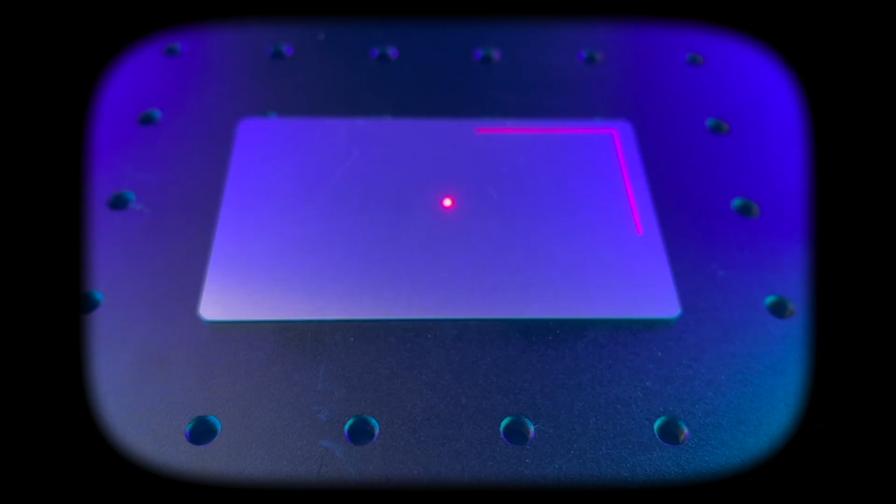Longer reached out to us to send their 12-watt Nano Pro Galvo diode laser. What's really cool about this particular laser is its portability. This is really the laser, so obviously very portable. They also sent us, as part of the package, a rotary extension and a slide extension for bigger projects. So let's get this unboxed.

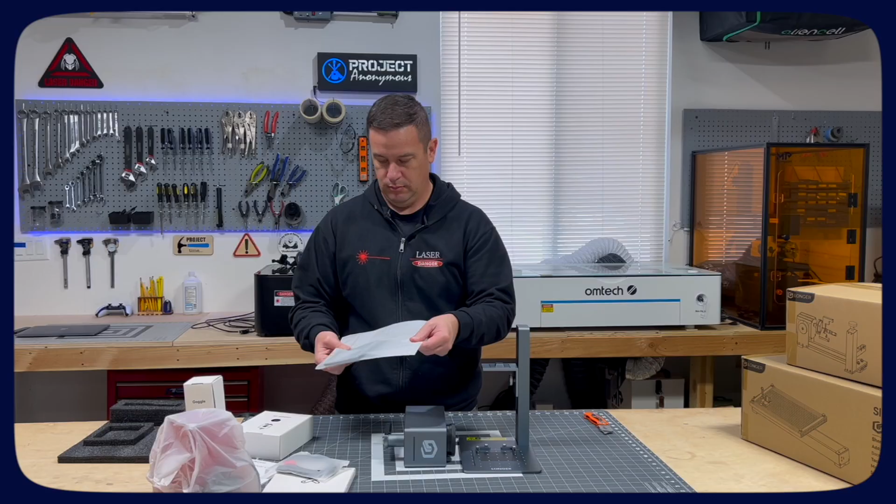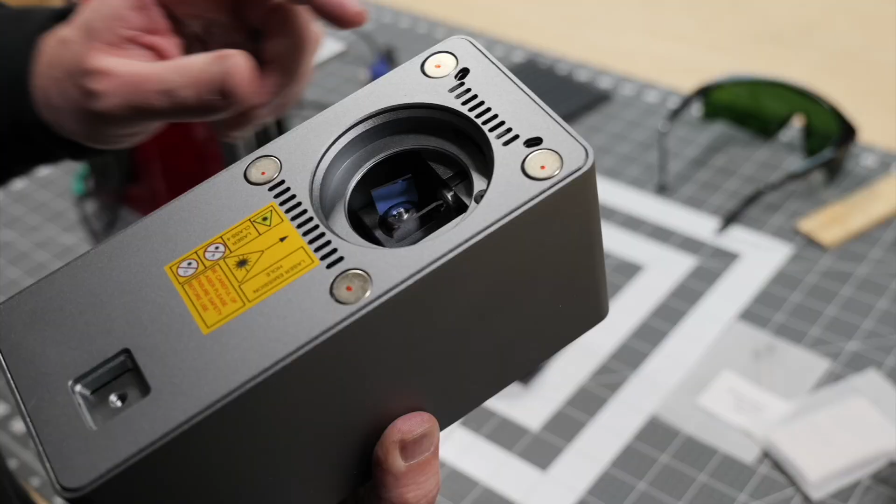Okay, this is it, everything that comes in the box, and we have it laid out. This is our laser head, obviously very compact, and what makes this kind of unique and different from other diode style lasers that we have is this is Galvo controlled for our axis control. Rather than using servos to move a laser head back and forth, it uses tiny little mirrors, which you can see here, and these mirrors move, which adjust where the laser is firing and going through our lens, which makes it so that we can run this much faster than we can a standard gantry style diode laser.

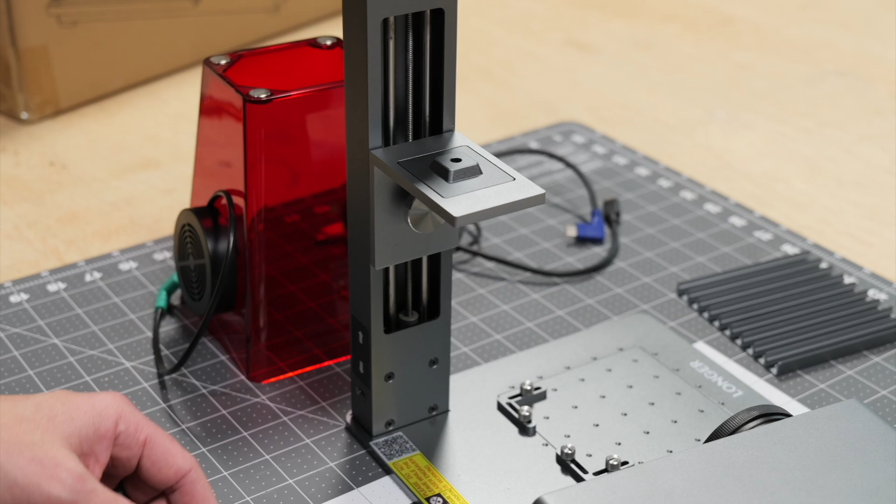Also in the box is our little stand here. It does have electronic up and down motion. It's not autofocus, but you can just push a button to get the laser head to move up and down. And then it comes pre-installed with a flat base plate with standoffs here to get repeatability, like if you had a bunch of projects to do.

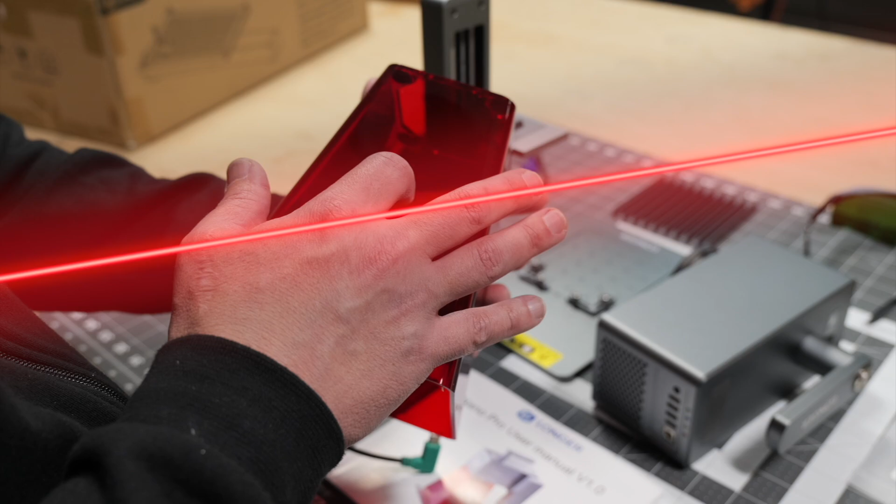It also comes with a cutting bed, which is three-dimensional here. It gets it off the table so it can cut through whatever material you're going through. Comes with a protective shield to make sure no stray laser beams are flying around our area. And comes with an integrated fan to suck out the smoke if you're engraving and cutting.

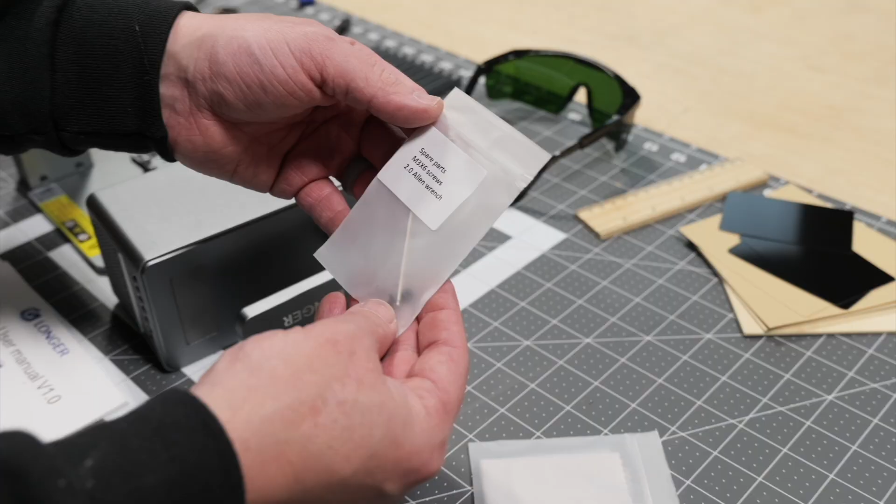Comes with some cables. We have a data cable here to connect to our computer and a cable to connect the laser head to the base plate. We have our power brick, a 12 volt 5 amp brick, a little thumb screw to connect our laser head to our base plate, and a software USB stick. This comes with LaserGRBL, comes with some goggles and a nice cleaning cloth, some spare parts and a tool, a focusing ruler, and then some test material. What we have here is painted aluminum cards, some paper, and a couple 2mm birch plywood pieces. And of course our instruction manual.

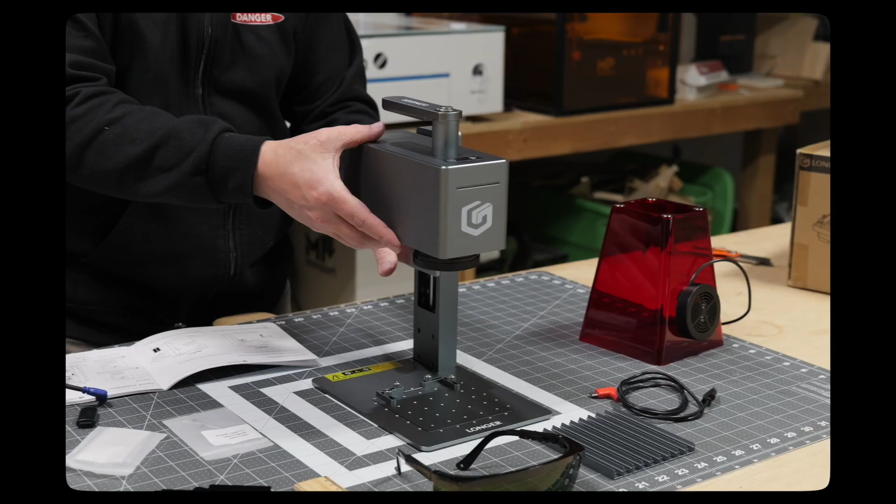It has some strong magnets on here as well as on the underside of the machine.

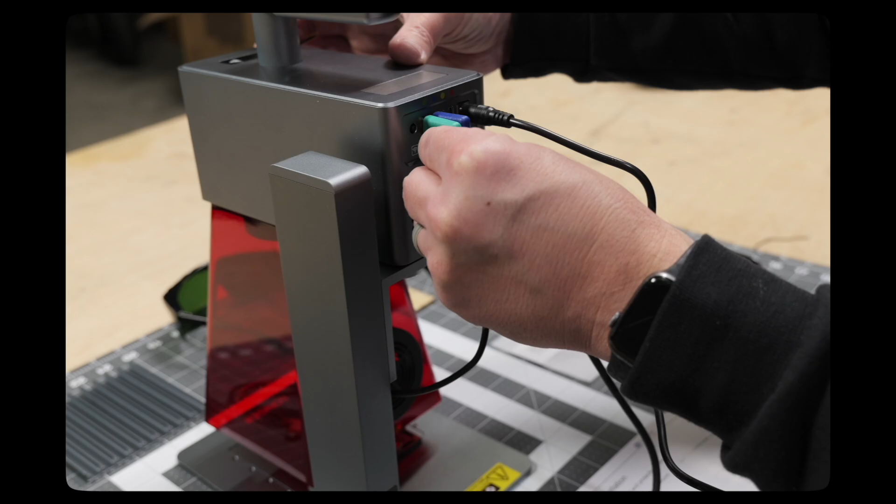We're on our computer now and we've plugged in the drive that came with the laser. It's very important that we install everything in the correct order or the machine won't connect to LightBurn properly. So the first thing we need to do is open the drive, and it comes with different files including instructional videos. It also has detailed manuals. Right now though, we're going to open up the software folder, and we want to copy over this driver zip file and open it.

In this file, there's an option for Windows and Mac. We'll be utilizing the Mac one because we're using a MacBook, and it comes with even more instructions that are very detailed and beneficial for this process.

What we need to do now is open the package file and continue through the pages and install the driver. Now we're going to click the install button again, but it's blocked, so we had to change some of our security preferences.

It's now installed, so we can close all of these windows. We also need to restart our computer.

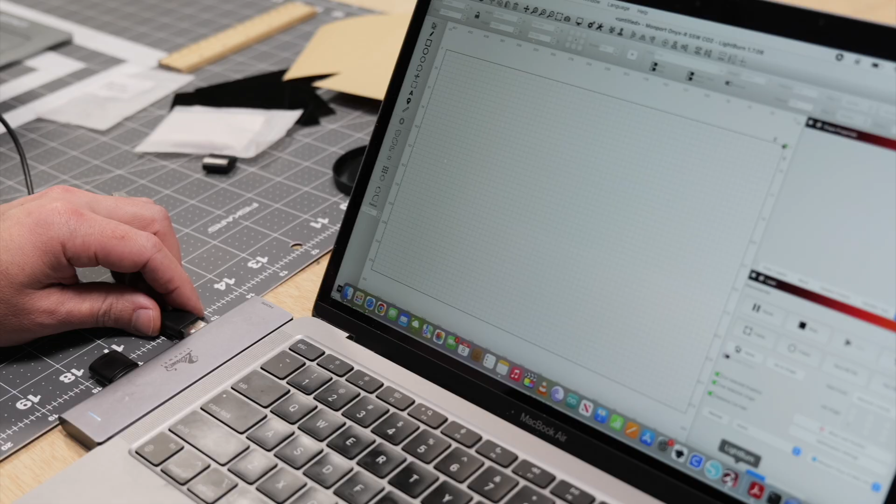Next, we want to plug in our laser and turn it on. Then we'll be able to connect to LightBurn by switching over to our Nano Pro. We need to use this specific USB serial or else our console won't show up properly. And now we're connected properly.

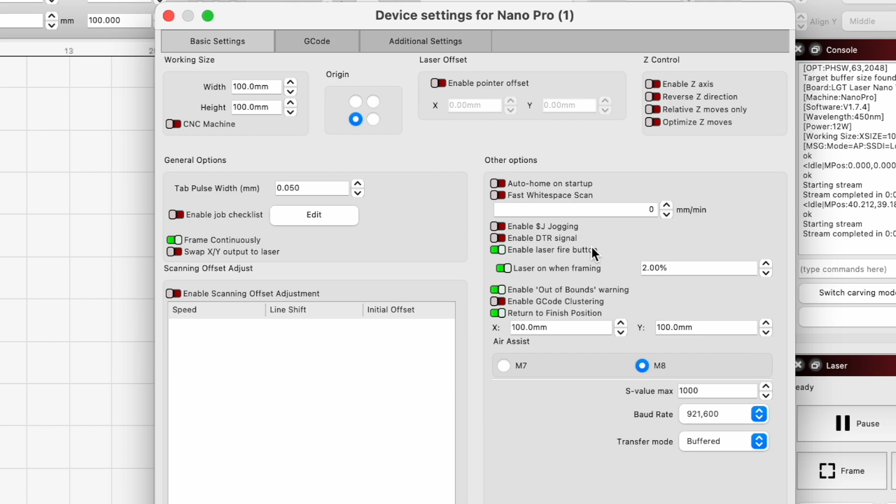We'll also do a test by framing out a square. But first we'll go to our device settings and we want to make sure we have our laser on when framing. We also like to have our laser frame continuously. Now we'll adjust some settings in the Move tab, which we like to have our speed as fast as possible, or 10,000 millimeters per minute. Finally, in the Console tab, we need to select the Switch Carving Mode setting, and we can now frame out the square.

And you can see we're framing. So now we're going to do a materials test on this aluminum card to see what settings we need.

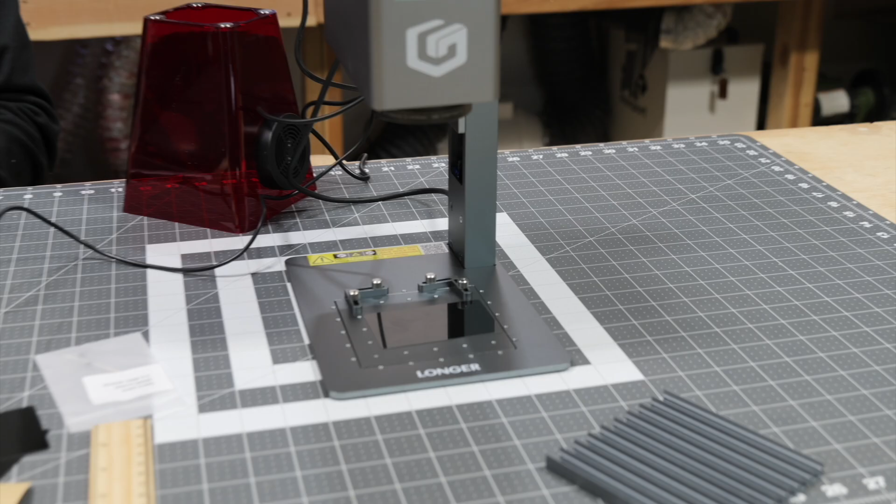To create our material test, we'll go to Laser Tools and Material Test. Then we're going to adjust our settings for the aluminum card. We'll do a 2x2 grid, a power param that goes from 20 to 100%, and a speed param that goes from 100 to 10,000 millimeters per minute. And finally, we'll adjust the settings of our text and material.

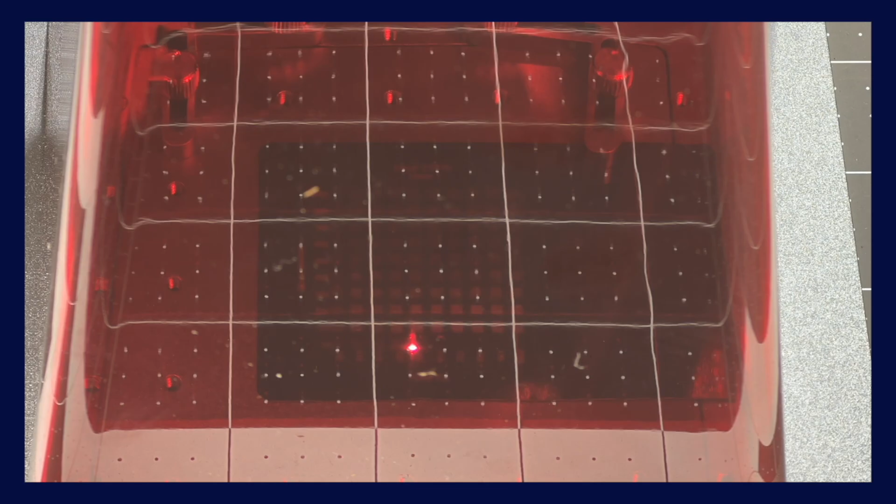We got some good results in here. We have a nice little gradient. We have a clear image. Yeah, even at the 10,000 millimeters per minute speed, which is really fast for a diode laser.

Again, comparing this against a gantry laser, there's no doubt this is way, way faster. This is almost like our fiber laser speeds here. Well, it's really like our fiber laser speeds, because the Galvos being the mechanism to move the laser along rather than an entire laser head across back and forth. So really neat here. You got some good, nice engravings. Well, let's do the other side with the Longer logo.

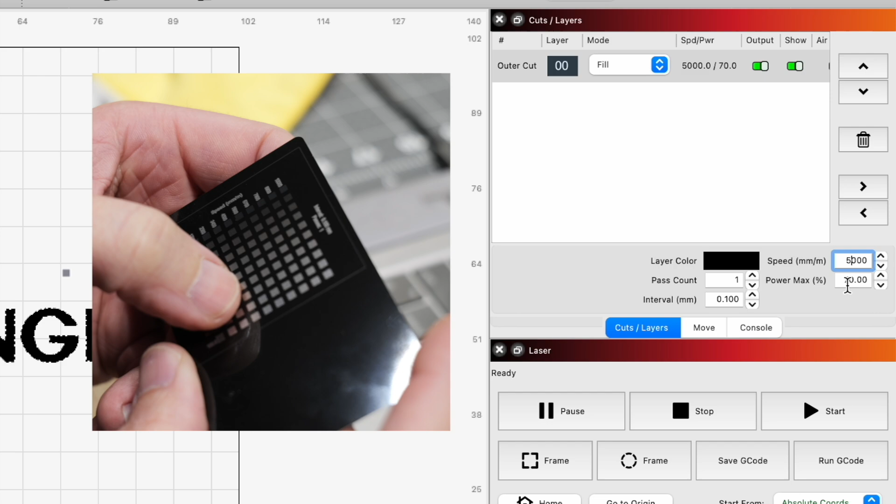What power are we going to use? Let's see. Let's do 5,000 and 80% power. So we can use this as well to get our height adjustment, or we can use the 2 laser dots. I go ahead and frame it and lock it down.

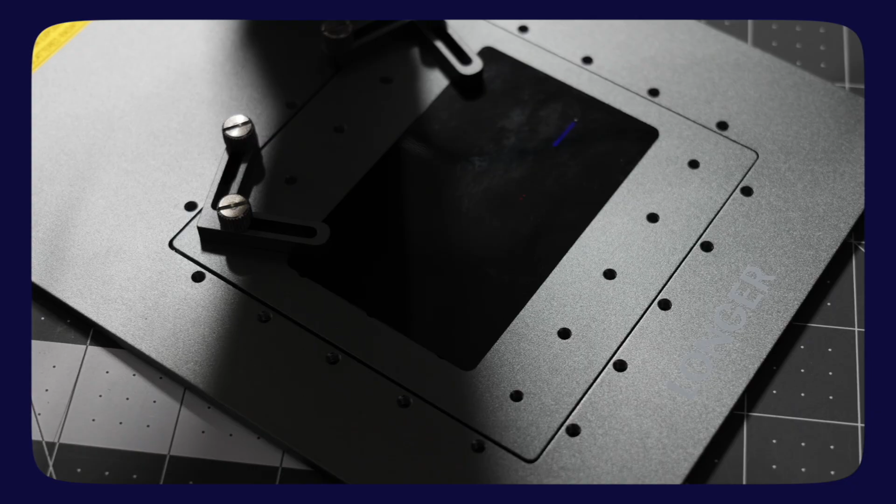I think the coolest thing about this right now is, I mean, listen, it's so quiet. It is really, really quiet. You can hear the sound of the little fan on the back of the shield and the fan that's inside the laser head module. But like, we don't have to listen to the gantry move back and forth. That's really neat. Obviously, the other really cool thing about this is, look how portable this is. It's so small. We could take this anywhere.

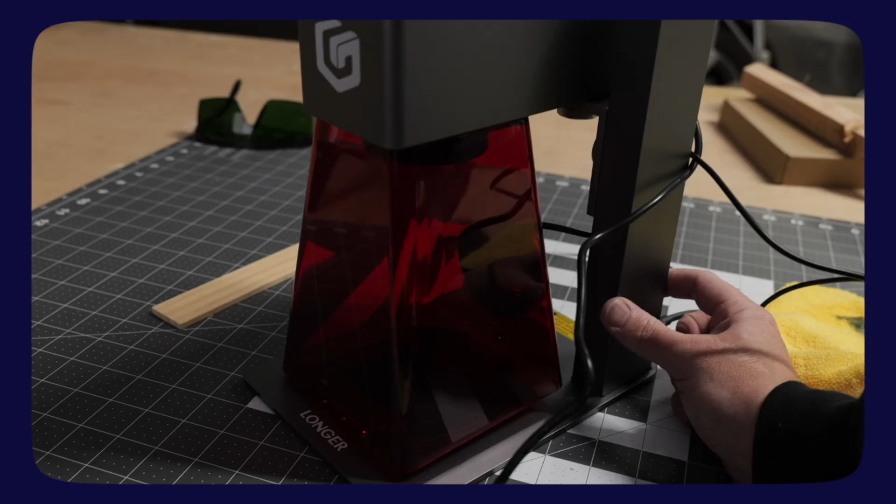It's really clean. I like it. Took all that coating off of this little aluminum card. Really happy with that.

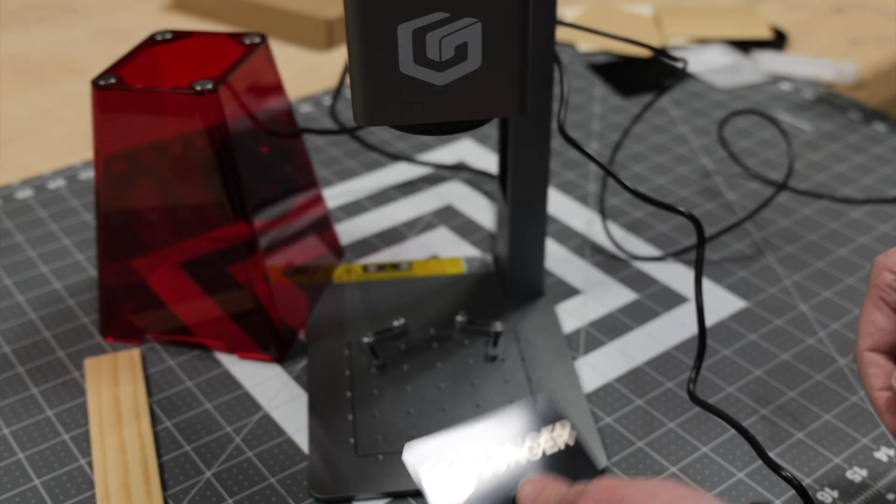Okay, so we've completed tuning up our laser using the offset adjustment. If you're interested in details on how we did that, check out our video on offset adjustments.

We're again in LightBurn to do an engraving material test on wood. We'll do a 10x10 grid with a speed param of 500 to 15,000 millimeters per minute and a power param of 10 to 100%. We're also going to adjust settings in the Cut Settings editor.

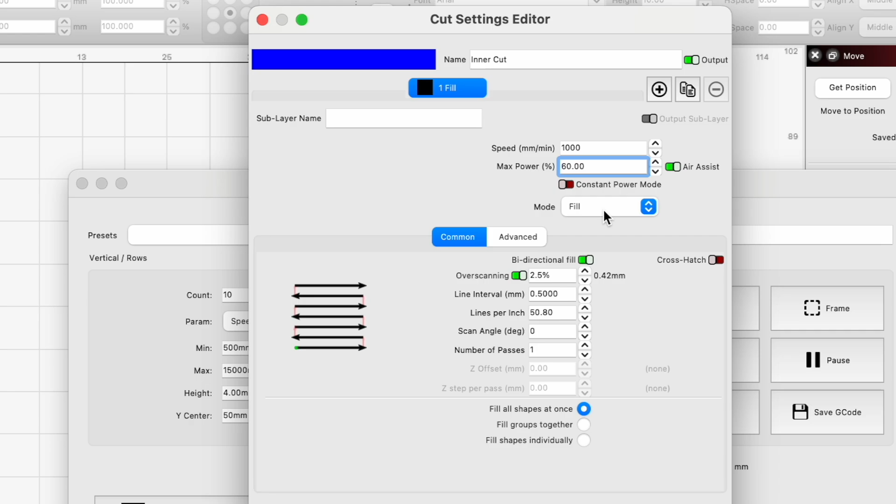So unfortunately, I'm using the brackets to hold this wood straight because it's sort of bowed, but in its outermost hole here for the brackets, it conflicts with the guard here before the laser comes in focus. So I can either engrave it without the guard, which is not something I want to do, or I can figure out another way to hold this flat. And I think I'm going to try that.

So I went ahead and stopped the engraving because clearly we are just burning. So we got some really good engraving marking here. And then we saw we went way too slow with 500 millimeters per minute. Overall good results, and we got some good settings that we can save for future use.

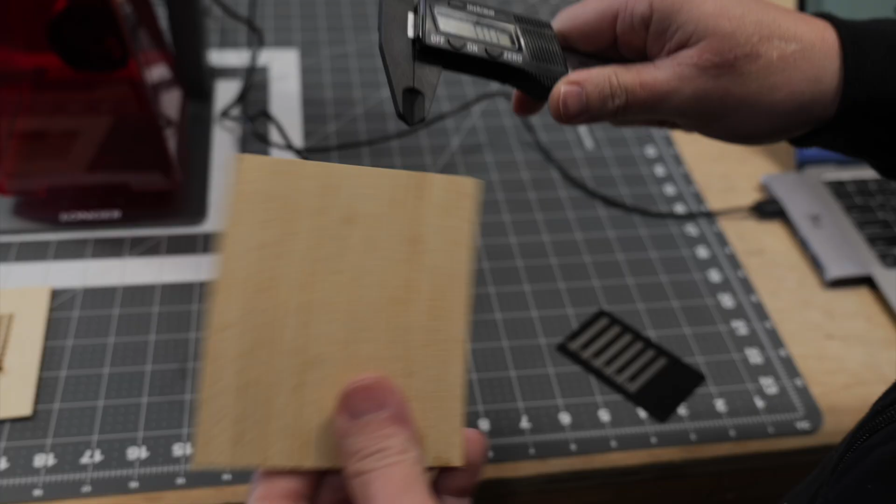So now we're going to do a cut test with 4.5 millimeter or 0.18 inch thick plywood. For this cut material test, we'll do a speed param of 500 to 1,000 millimeters per minute and a passes param of 1 to 6. And we need to make sure we are using the line mode in the material setting because we're doing a cut test.

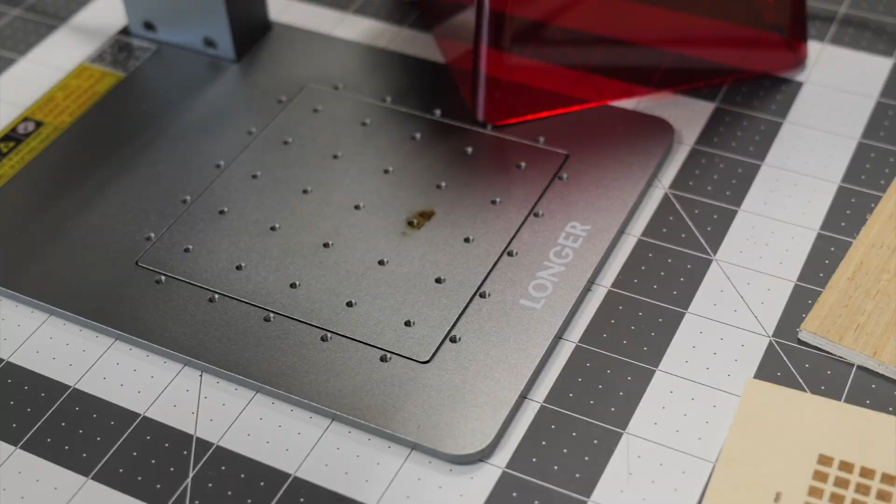See, our engraving went a little too deep, but that cleans off pretty well. Use our cutting table.

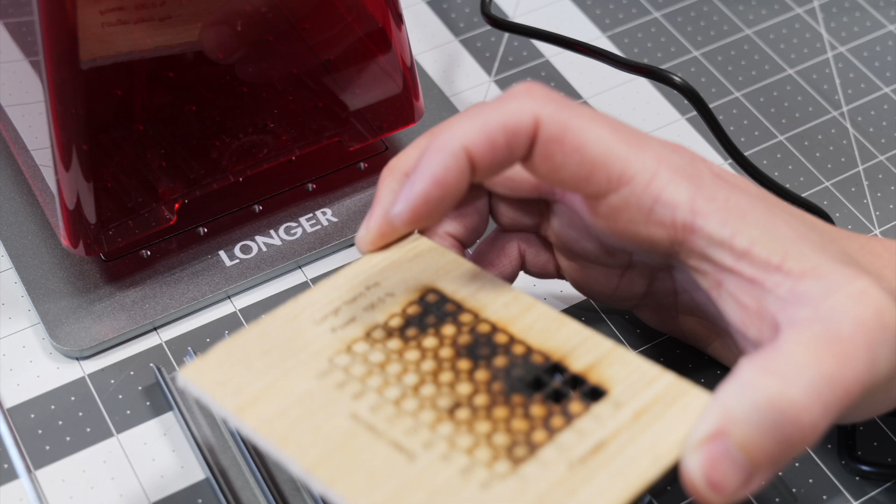Well, it looks kind of charred, but it did cut through some of these. I think the key is lower power, faster speed, and more passes to get a cleaner cut. But I think obviously the true value of this is engraving anyway, but it is capable to cut.

Now that we've completed some of the testing with our laser, we're going to go ahead and dig into some of the accessories that Longer sent us. The first is this slide extension, which takes the active work area from 100 by 100 millimeters to 100 by 300 millimeters in the Y direction.

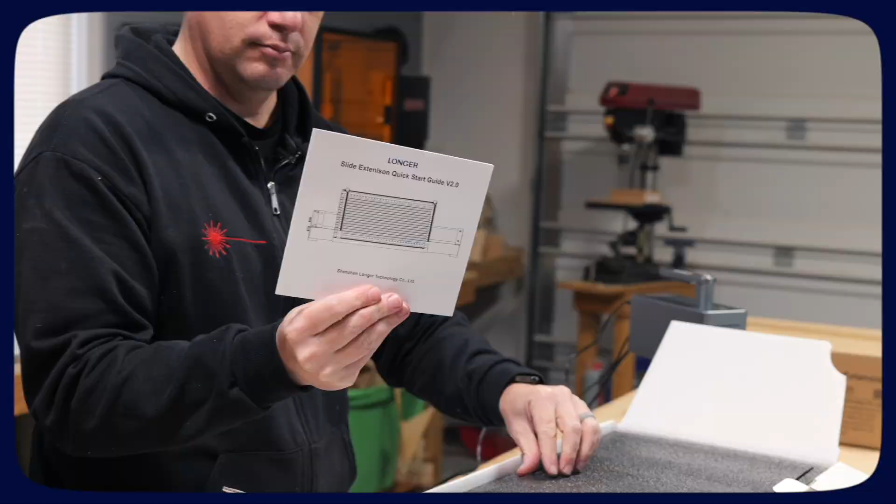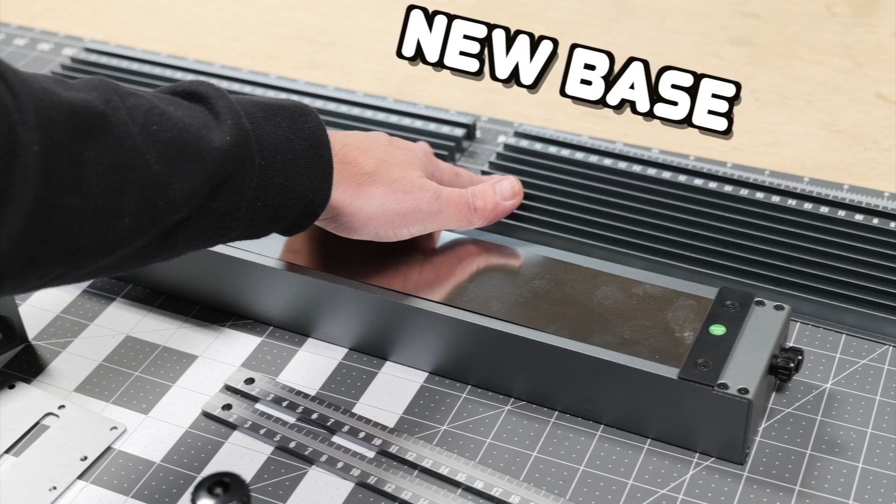Okay, so here's it all laid out and everything that it came with. Here's our new, basically our Y gantry now, or slide, so it will actually move in this direction. And then the new base came in 2 pieces with a little base plate here. Comes with a riser for our laser head to move it up, along with a thumb screw. It looks like some workpiece attachments to secure your stuff, some scales to help connect the 2 halves there, some feet, the cord that will end up connecting this motor to the head of our laser, and then some hardware.

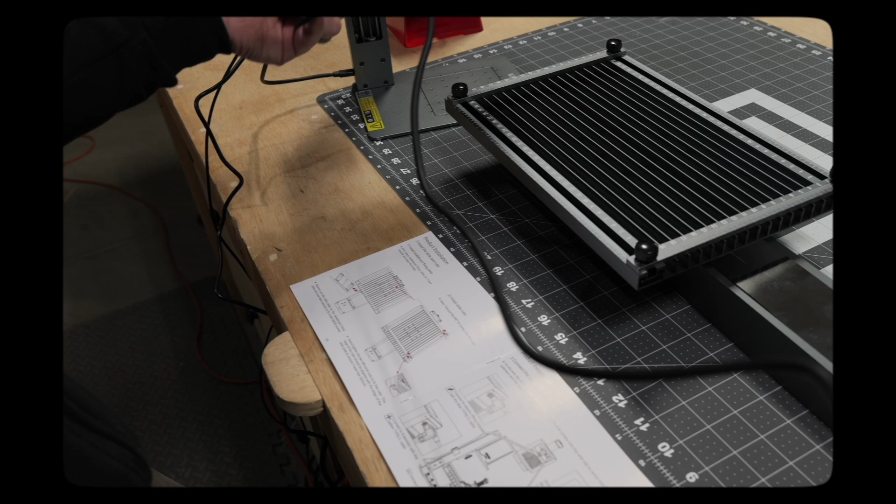This is to make sure that none of these cables get stuck in here as it's traveling.

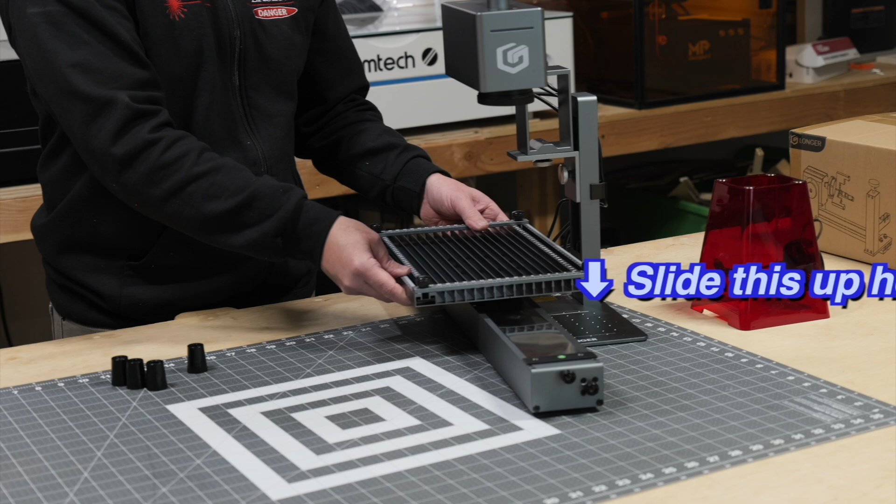There must be some kind of redesign here with the slide, because you're supposed to just slide this up here and that would be kind of where it's set, but the feet are different. Nowhere in the instructions does it tell you to put the feet that come with it on, but this does significantly raise it to where it'll be a lot higher, and we wouldn't have anything to rest this on. So I'm going to go ahead and put the feet on because I really have to, otherwise our piece will just fall over like that.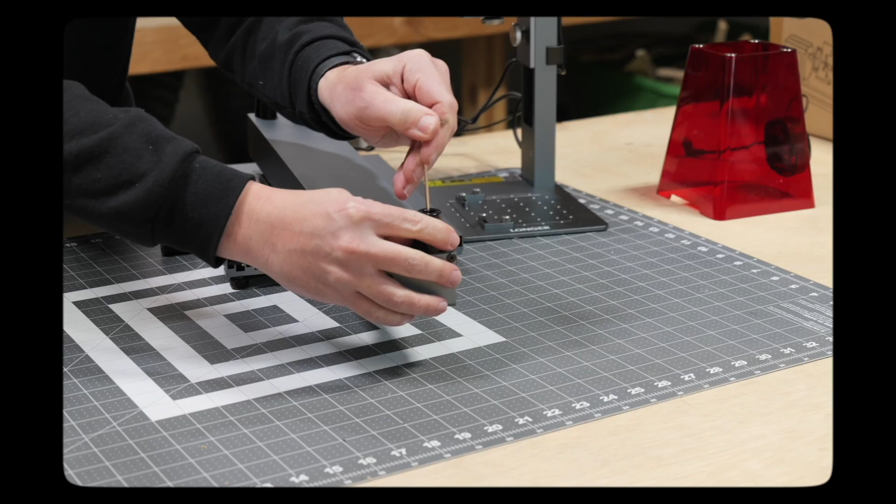So you can see here now with our feet on, we don't have to worry so much about it tipping over. There's nothing to rest this on to ensure that we are completely straight in the Y direction, so we're going to have to come up with a solution to make sure that we're always set where we need to be. But anyway, that looks like everything we need to do here.

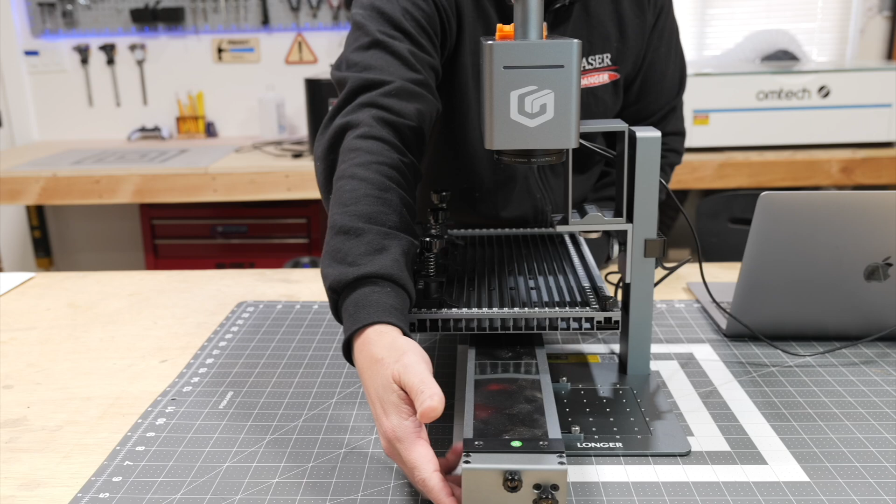Okay, so we have it roughly set up. The key thing here is making sure that our laser head module is parallel with our axis, which again, with these new feet, doesn't necessarily line up with how it's supposed to be with the instructions. So we have to kind of eyeball it to get it just right.

Additionally, as part of this setup, you're going to want to use some levelers here because with the weight on this bracket, it kind of goes like this naturally. But there are some grub screws here at the bottom to help offset this and get it sitting right. So you have to adjust those grub screws to get this to sit somewhat parallel.

So now we're going to go ahead into LightBurn and get this set up for engraving a larger project.

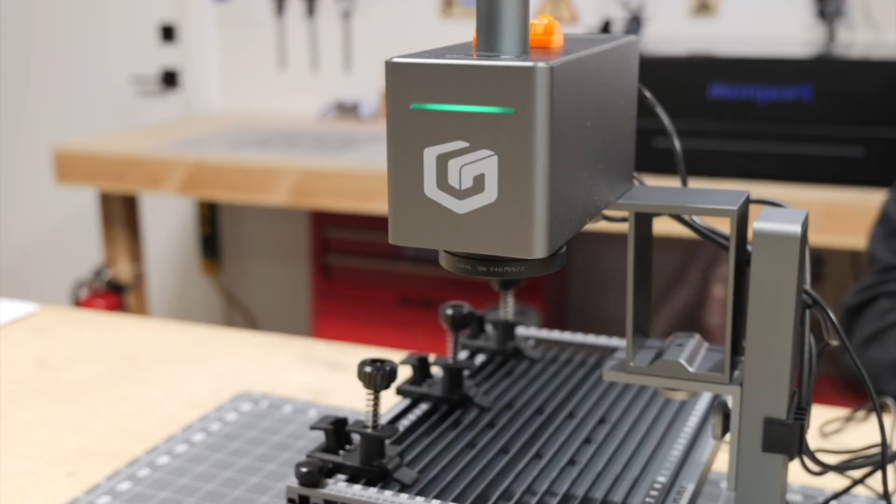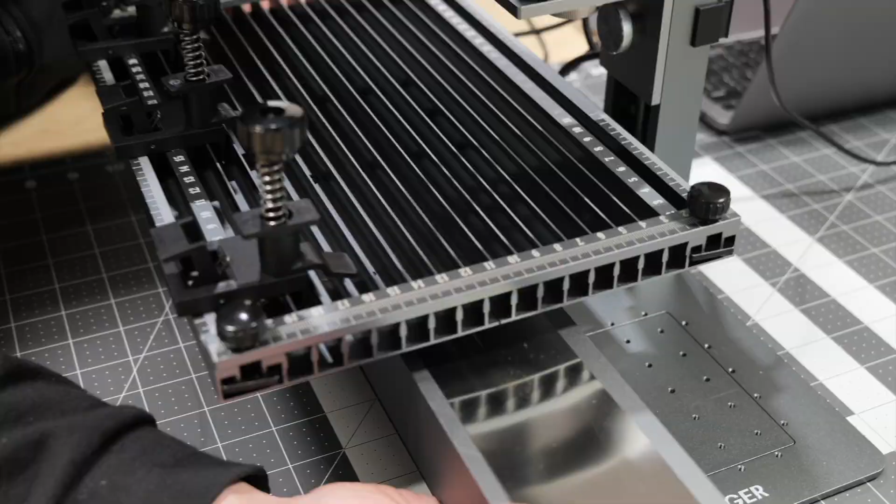I need to hit this switch slide extension button in the console, which will activate our bed here. Now, as far as homing this thing, there is no home button, but we can use our little laser lights here. Unfortunately, there's really no real way to home this better than just putting this red dot on the tip of our thing here. So I'm just going to line that up as best as I can. That's how you're supposed to set up home, which again, it's not really the best option, but when this unit is completely separated from the base, there's really no other way.

Again, we need to make sure that this runs parallel and that we have enough space for this to run back and forth.

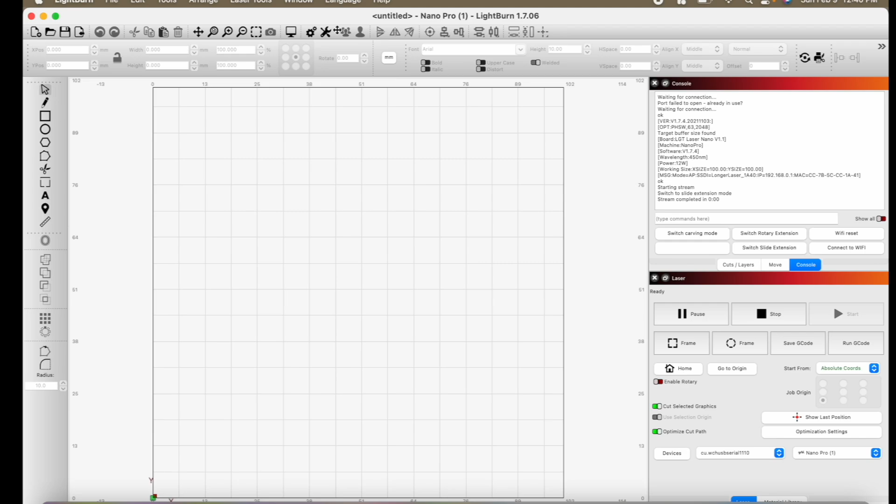In LightBurn, we need to change our work area. So we're going to go to the device settings, and then we're going to change the height to 300, because now our work area is 100 by 300.

Now to test the full movement of this, I'm going to go ahead and draw a box that is roughly the size that we need. I'll just go 99 by 299, and then I will center that box.

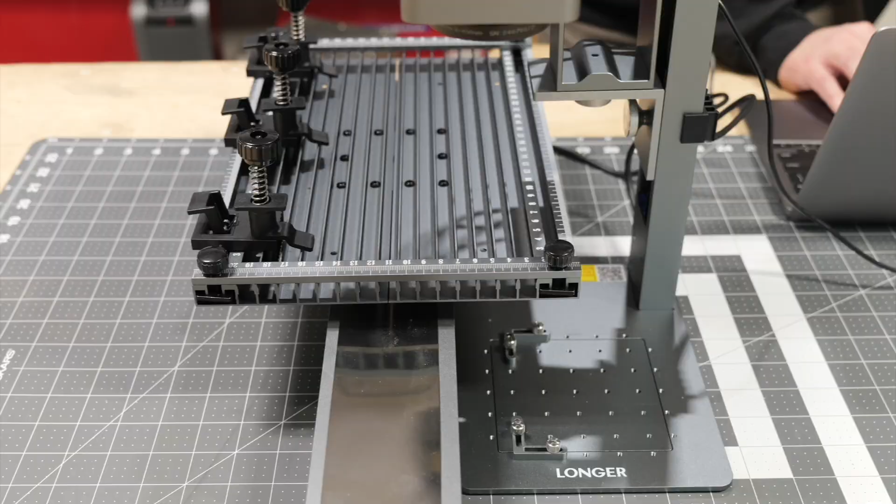I'm going to go ahead and frame this out now so you can see kind of the full movement of our new bed. So you can see our light right there. So I'm going to have to move this over this direction more.

Okay, and that's it for setup. So now we're going to go ahead and do a little design.

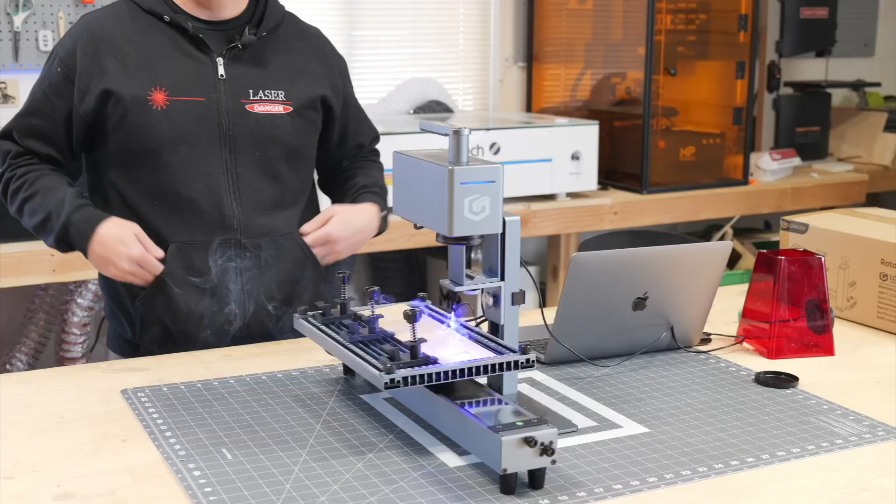Very important here, we don't have the guard on because it would interfere with our hold down clamps. So make sure you wear your safety glasses.

Now it's time to unbox this rotary.

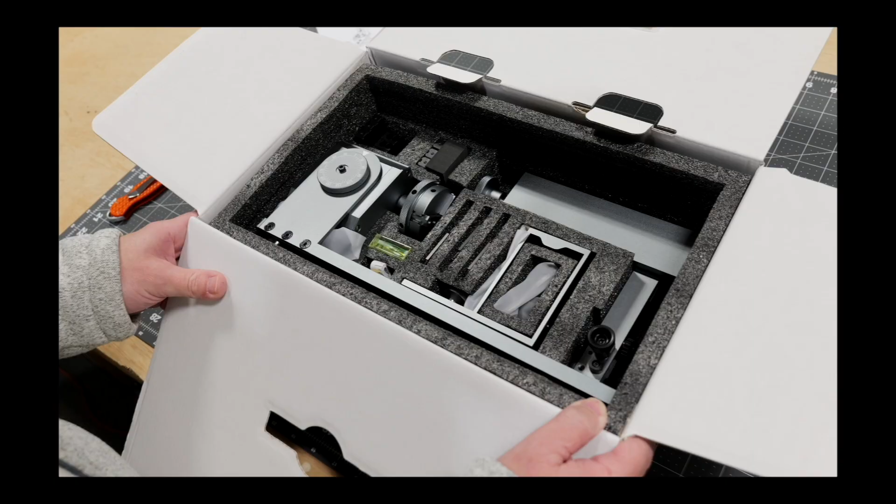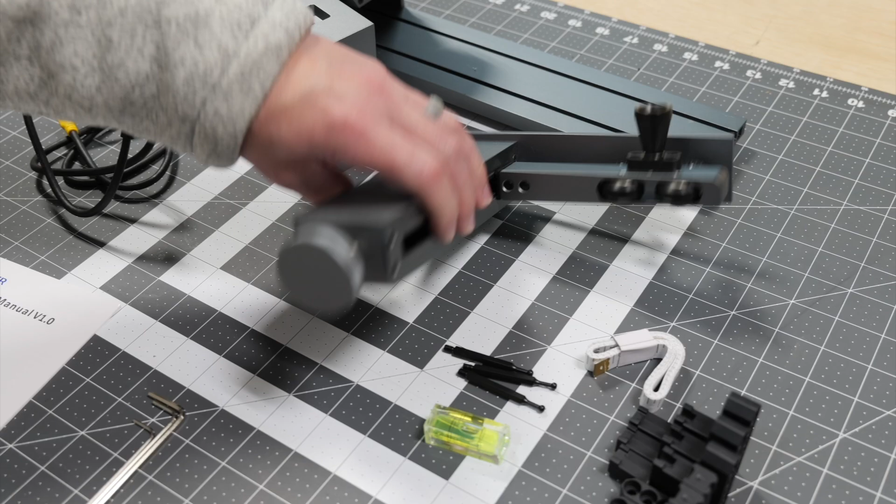All right, so here's what comes in the box. We have another clear instruction manual, which is nice. We obviously have our chuck head unit here, as well as the tailstock, which just mounts onto it like so. It comes with another extension here to move our laser head up a little bit higher. This is exactly the same as what came with the slide extension, so we don't need to install this again, but now we have a spare. It comes with a nice little spirit level, as well as a measuring tape here.

I thought we would need this to measure circumference of our cylinders, but with the software, we just need the diameter of the materials, the cylinders that we are engraving.

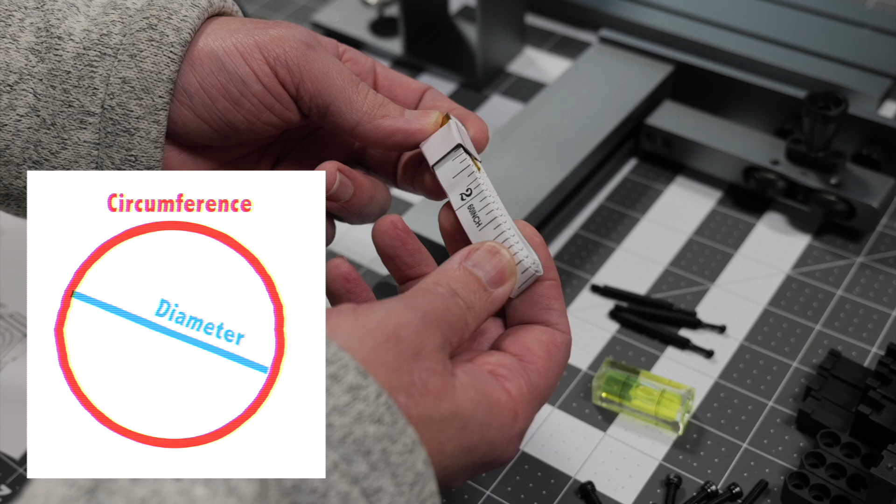So I'm not really sure how much we would use this. Comes with a couple different chuck attachments depending on the size of what you are engraving, as well as some little fingers for smaller things like rings. You could use these to clamp something that's really, really small. And of course, we have the hardware here and some tools.

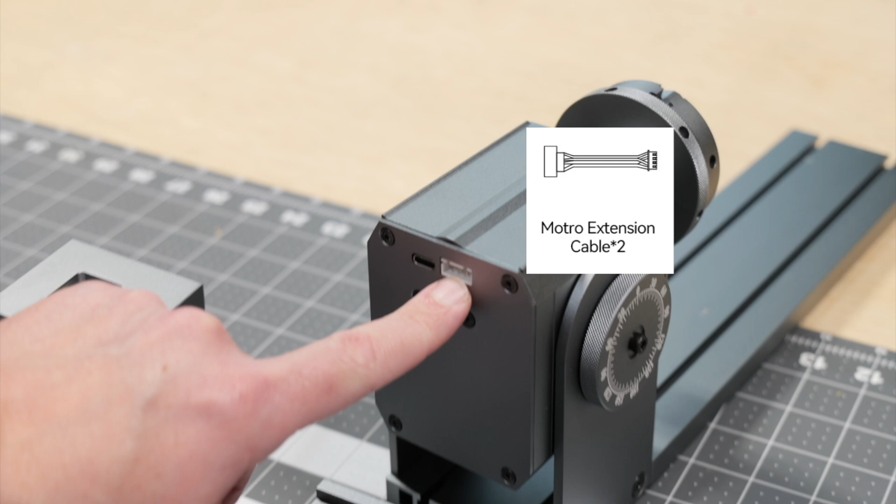Now, interesting here is on the back of the machine, there is a spot for both the USB-C type connection for our stepper driver, as well as kind of a traditional connection to a stepper motor. And it does come with these cables that could connect to that, but these don't connect to our machine. I don't even think we need them, and they're not listed in the instruction manual as something this machine comes with, so I'm not really sure, but we will be using this cable here to connect to the back of our laser head.

So let's get everything set up.

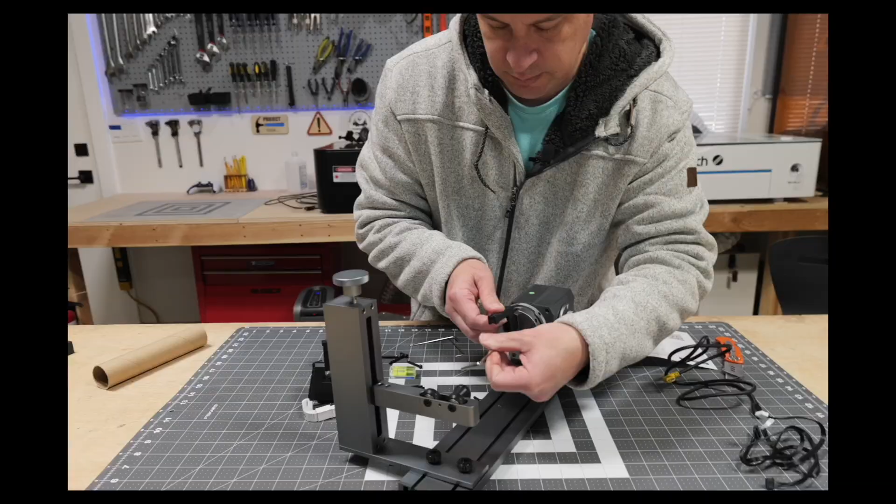Okay, so putting this on, we're going to actually choose a different option here because this is as small of diameter as we're going to be able to get. And we're just going to test here on this little paper towel tube. So that's too big. We're going to switch to one of our other options and see if we can clamp this down. We can always clamp this backwards.

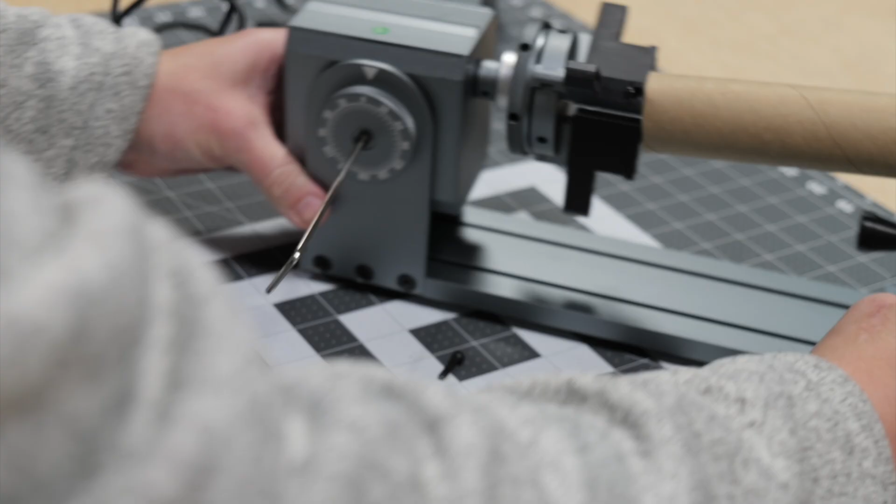This is to make sure the motor is parallel. So now that we have everything set up in the rotary extension, let's go ahead and get it set up with the laser.

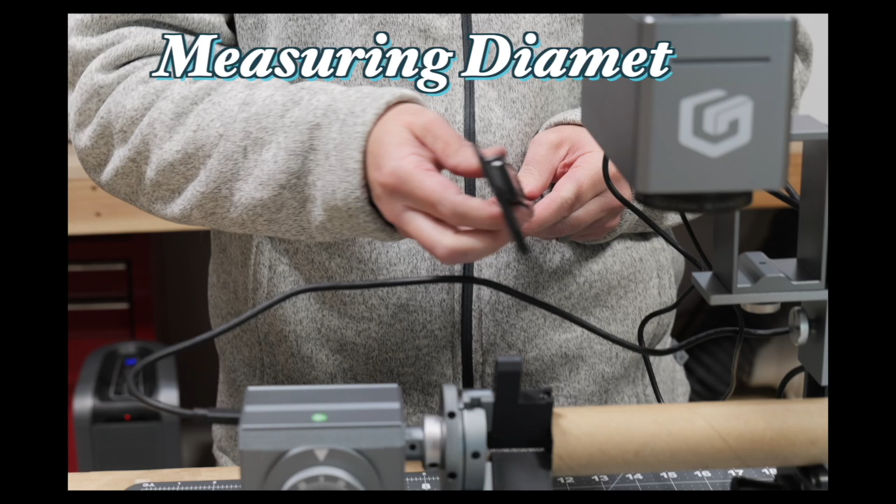So I'm going to connect to the laser, and we are connected. Setting up the rotary here is pretty simple, not automatic, but there are some things that we need to do according to the instructions. The first is defining our work area again, because this is our work area with our slide extension, and we need to update that.

So in our device settings, we're going to go ahead and set this up with a height of 480 millimeters, and I guess that's the work area they want us to have here. The second thing is updating in our console to switch to the rotary extension. And then there are some updates we need to make here.

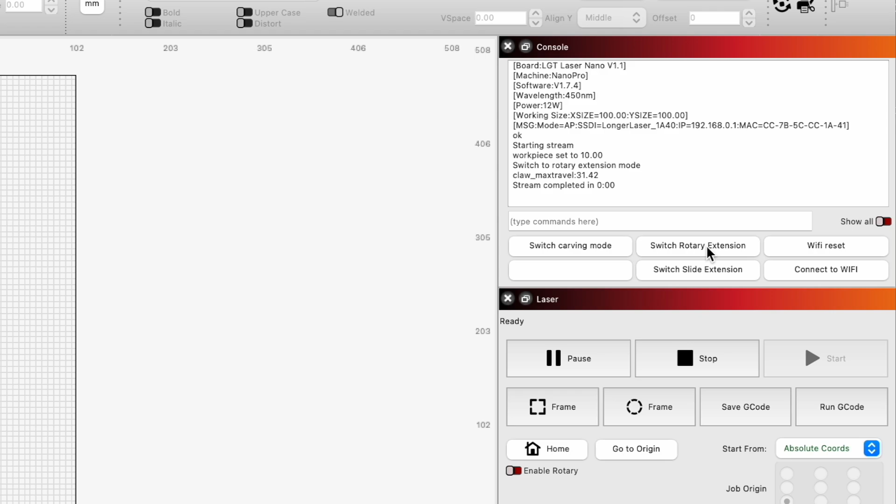So we have to actually right click on the switch rotary extension, and we have to change our workpiece diameter. And again, this is why we measured our little cardboard tube here. So we're going to update this to our measured diameter in millimeters, which was 39.4. Then we're going to hit OK, and then we're going to hit switch rotary extension.

In LightBurn, defining rotary settings, we don't have to do that anymore. It's all done in this macro saved in our console. So now we just need to bring in our design, and we'll go ahead and trace that.

So we're going to go ahead and go to our settings. It's going to be our fill. And to engrave this, we're going to just do a pretty light 10,000 millimeters per minute and 40% power. And because this is just a test, we're going to put that to 0.1 millimeter interval, one pass.

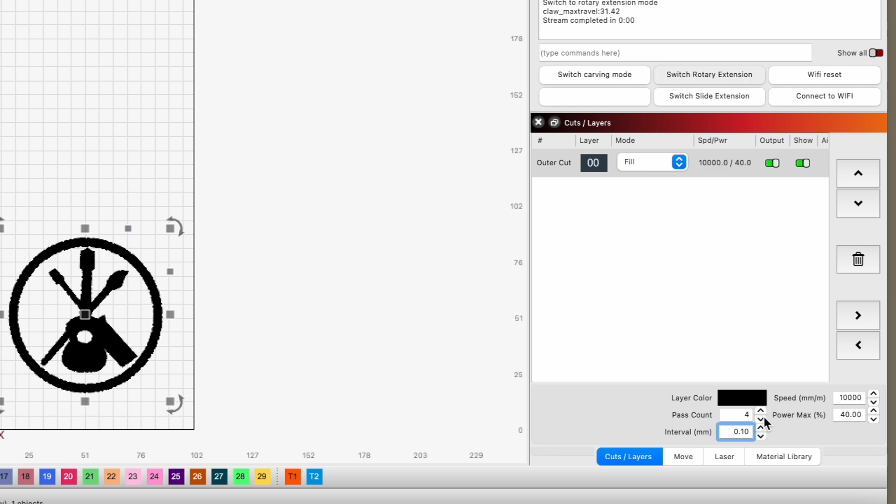So now let's frame it and see if we can get this to move. Actually, we got to focus it, don't we? Let's focus this first. I'm going to make this a lot smaller because I don't really want to engrave something this big.

Now I'm going to hit frame and see if this frames out. Okay, so it's framing out right now. Basically, what you want to make sure of is that the blue laser dot, which is the actual laser on very low power, is sitting on the very top of our cylinder, which it's close enough, because that's where we focused this laser to. So now that it's done framing, I'm going to go ahead and start the engraving.

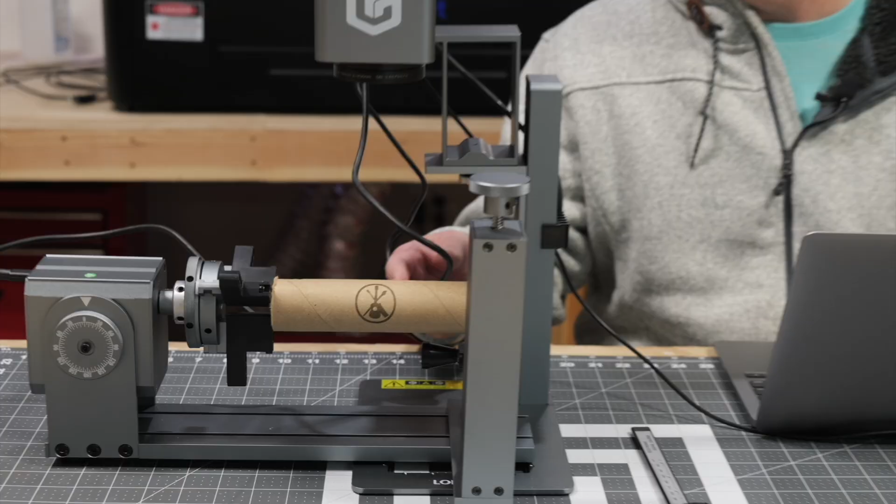Okay, so we got our first engraving complete here on this little paper towel holder. Now it is a little bit skewed because I didn't have this tight enough in the chuck, so it was kind of lifting up as it turned around, but it's not stretched out, which means we got the diameter measurements correct of our little cylinder.

Some things of note, some connection issues that we had, and I think this is really just our computer. When we went and edited the macro for the rotary extension to set our diameter, I was having some connection issues in getting this to hook up correctly, but I restarted LightBurn, went back in, and everything seemed to be working fine, and we were able to get really easy engraving.

So I will say, provided you're not having any software issues, this is really easy to connect and set up. Compared to other rotaries, especially roller type rotaries, where you have to get the roller diameter, circumference, and everything else correct, this is a lot easier because the only number you need is the diameter of your cylinder. Set it up in the right position, hit the macro, and go.

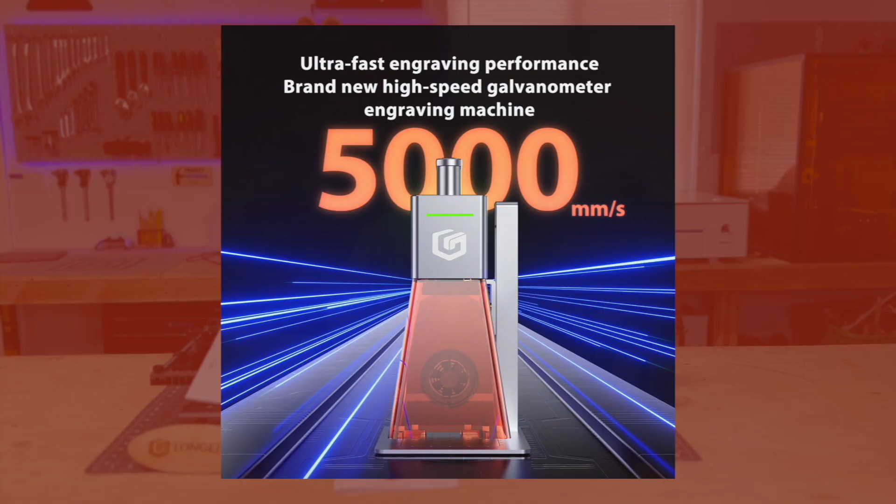After thoroughly testing out our longer laser and its accessories, we have a few final thoughts. First things first, this is a really cool portable laser. We do like the fact that it is very fast at engraving, and its portability makes it so that you could take it anywhere, whether outdoors or to engrave at craft shows. We really like that feature about this.

Now, would I use this laser engraver to cut? Probably not. I wouldn't say it's the greatest for cutting, simply because there's no air assist with it, so we get flame ups quite a bit. You saw that when we cut out our little longer sign over there, and I think that's because there's no air assist to blow that fire out. Additionally, because the laser is coming from a center point and aimed outwards, the kerf on this is actually rather large. So on something as big as that, you can see when you engrave it, the edges are angled versus straight up and down like you get with a gantry style laser cutting it out. That's just something you have to know before getting this if you're planning on using it for cutting.

We would absolutely use this for fast engraving, specifically on anodized aluminum. It does a fantastic job with that.

As far as the slide extension attachment, we personally wouldn't use this because we have our choice of many gantry lasers as well as CO2 lasers that already have a large work area. But if this is the only laser you purchase and you want to expand your work area from 100 by 100 millimeters to 100 by 300 millimeters, then you can utilize a slide extension here to expand that. If you're looking for a laser system to engrave larger things, this is probably not it. But if you're looking for something that is really fast, powerful, and versatile, this may be it for you.

We also like that if we have a normal trapezoidal style cup, we can adjust the height of the tailstock really easily, and it does have a roller tailstock for smaller diameter things as well. It's really versatile when it comes to engraving very large cylinders as well as very small ones. As you saw, there are several feet that go onto this chuck. We also like how fast this engraves. With this chuck, you could do tumblers really fast and easy without a whole lot of setup. So we would purchase this as it's very useful.

The other added bonus of having this portable design is we can engrave in any orientation we want. We can engrave on the ceiling if we wanted to, and we were able to hold it up steady for that long. The ability to just aim this forward and engrave is really cool. Now, we did use the base when we engraved on our little drawer because we wanted the protection for our eyes. If we were to bottom this out, it still wouldn't be in focus because there's this 1/8 inch base plate that would not be in focus with this in the way. But we could also take this off and engrave with the base plate completely removed, because the bottom comes out, which is another cool feature of this. We can engrave our table just like that. So being able to move this anywhere you want to engrave is certainly a plus that you do not get with a gantry system. You can engrave a sign on the wall that's already hung up if you wanted to.